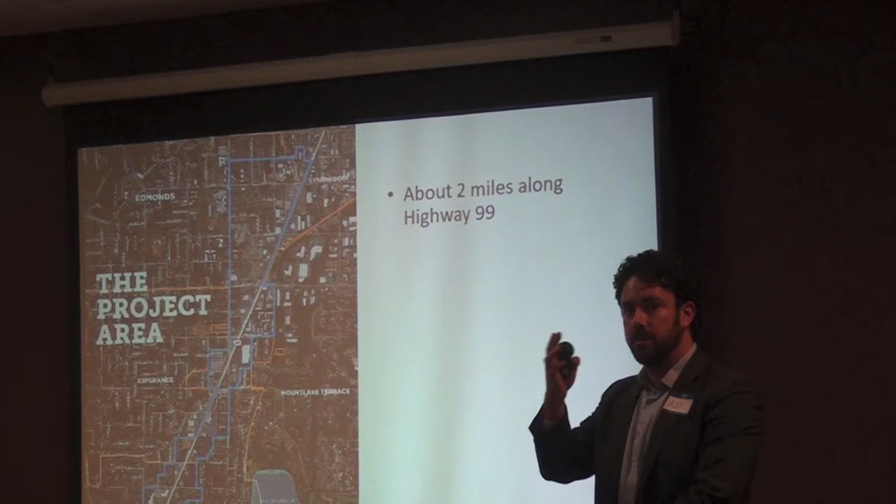So generally, I think we're all sort of familiar with the project area. It's a 2-mile stretch along Highway 99 in Edmonds, highlighted here in blue and also on one of the boards.

One of the things that came up both in previous planning efforts and as part of this effort was that a sense of identity was really needed on Highway 99, so you knew where you were. Some organizing principles came up: in the south end of the corridor, there's an opportunity to really present that we've arrived in Edmonds, the Gateway District, emphasizing that you've arrived and a sense of place there.

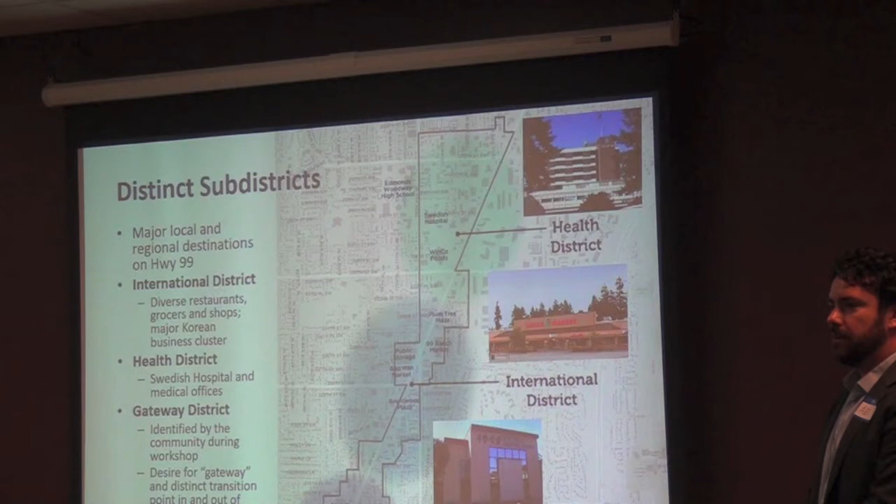There's an international district. There's already lots of businesses, grocery stores and restaurants. We want to reinforce that area of Highway 99 and engage with folks there to figure out what the next chapter for that stretch of Highway 99 is, the international district.

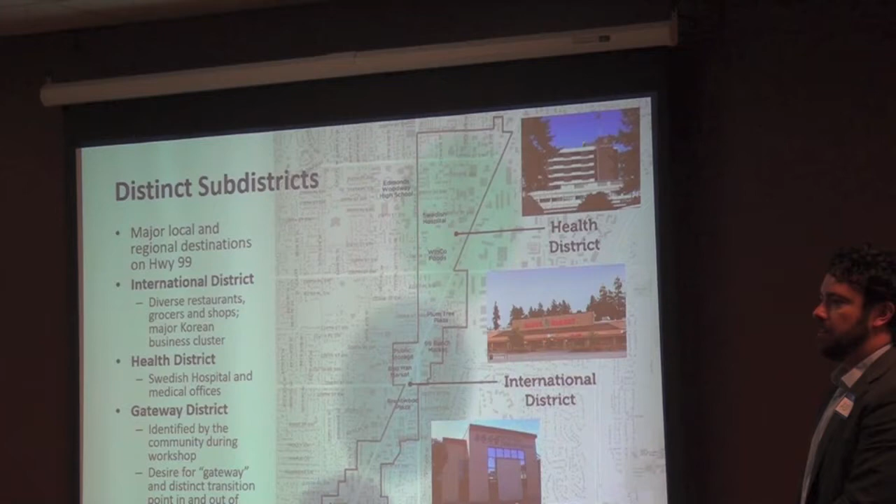And then obviously the health district, where we are right now. There's an opportunity to think about associated industries that are complementary to health, and also nurture that critical employer in our city.

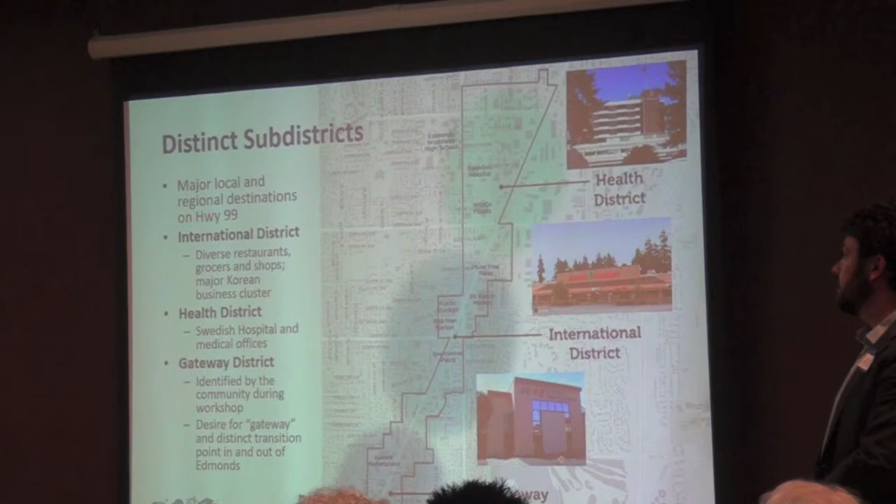The analysis portion of the process identified several things. It identified not only where we already have pretty good urban bones, good street connectivity, a lot of economic activity, but also where we have some missing legs of the stool. So there are stretches of 99 where there's a very long way before you can safely cross. That was identified as an issue we wanted to address in the plan.

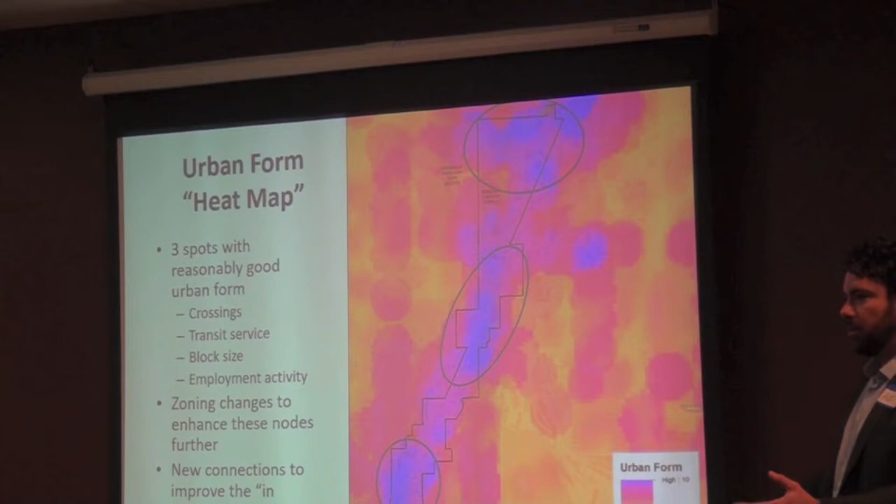So we did a lot of computer modeling and walking tours to figure out what was working and what wasn't, and that, along with the public workshop information and testimony, has shaped where we are today. As you can see, there are some stretches of 99 where safe crossings could benefit pedestrians and folks walking to school and the like.

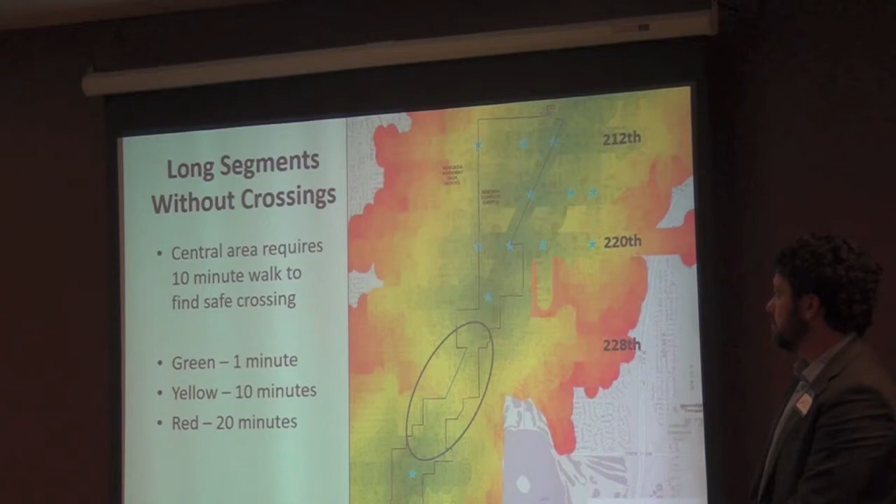In March, we had a public workshop. This was an opportunity for probably a lot of you to share what your vision for this stretch of 99 should be, both in terms of transportation improvements that make this place better and safer from the pedestrian point of view, from bicycles accessing and crossing Highway 99, from transit users' perspective, and also safe and more predictable auto movements, because there are a lot of auto conflicts that exist on Highway 99.

But in addition to that, not just stopping at the road, what's the future of the land use, and what are the land use opportunities? So both land use and transportation visions were established in that process, in that workshop.

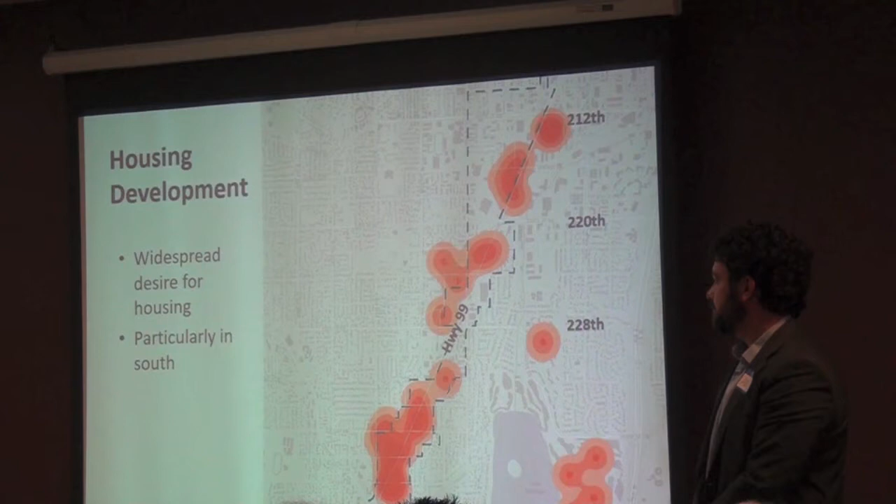Some of the outcomes: there's clearly a desire for additional housing options on and around Highway 99. Mixed use is not new to this region, but it is a rather new concept in this particular area. There's a desire to see more mixed use that includes residential and office uses above ground floor retail uses.

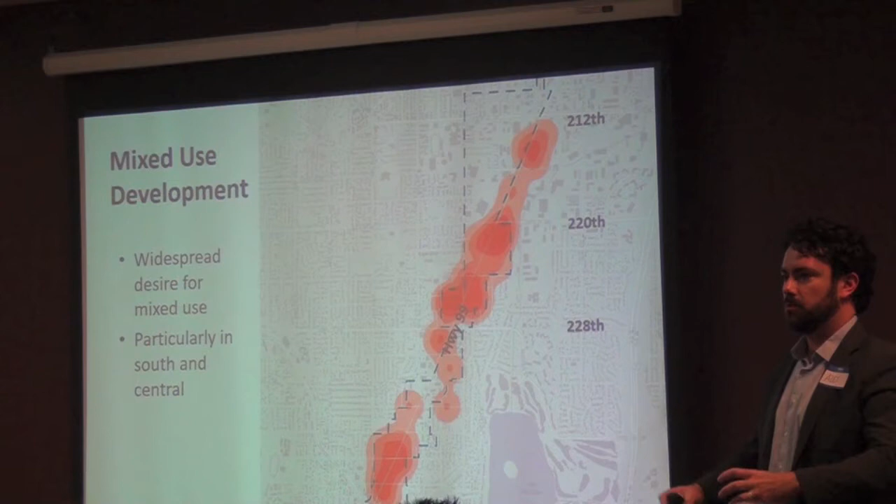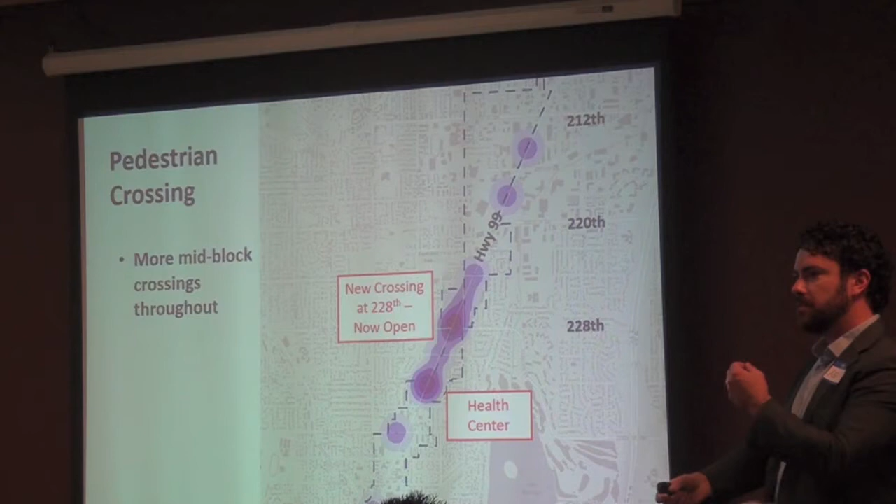There were very specific recommendations on needed improvements for pedestrian enhancements. You can see where these hotspots came up, where a lot of people put down chips repeatedly and told us loud and clear that we needed to strengthen connections in some of these areas.

The community values that are really our touchstones as we have progressed along the process are about connectivity, both along the corridor and across the corridor, accessing destinations, reinforcing the destinations that exist today, but also thinking about what are the new destinations we want to see achieved on Highway 99.

Beautification was a big one. Right now there's opportunities to think through medians that are landscaped and introduce tree canopy, making it a more pleasant place to both drive and walk and use transit.

Safety and walkability - obviously there's been some high profile pedestrian incidents on the corridor, so we want to make sure that whatever we do has an emphasis on safety and ensures that walking is a very safe thing to do.

Affordable housing, obviously in this region, is a major concern, and this may be an opportunity to think about affordable housing opportunities within this area. And then supporting healthy businesses and a wide variety of businesses on the corridor.

So these are our touchstones. Whenever we have issues, we try to go back and say, is this addressing our goals and our community values?

So a high-level overview of the plan outline, and this will be circulated in draft form here after the new year. We're going to rehash some of what we've talked about today.

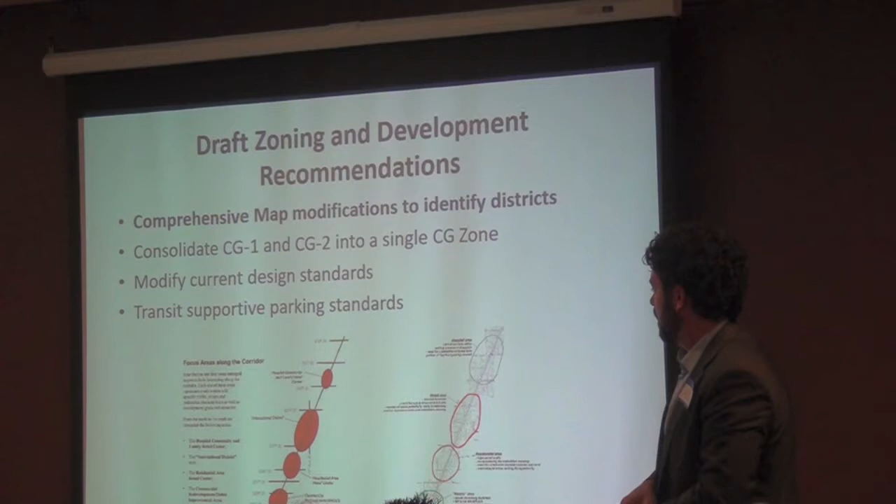So there's a need to update the comprehensive plan to reflect what we learned in this process. That involves updating how we now view this stretch of corridor in terms of the sub-districts: the Gateway District, International District, and Health District. So we want to update the comprehensive plan to keep it fresh and current to reflect this planning effort.

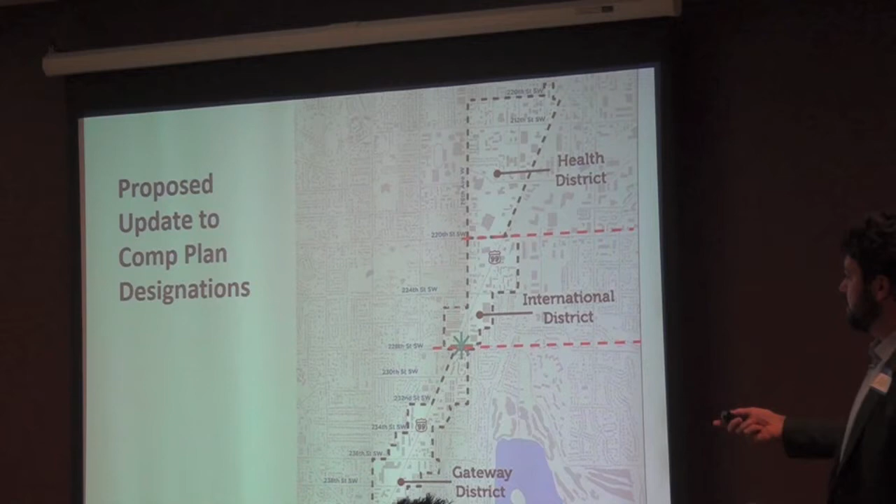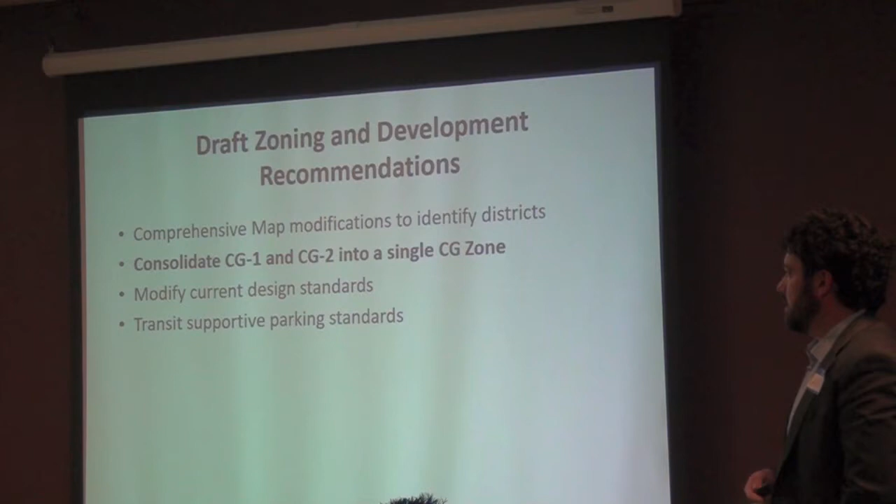This will be the map highlighting those and then some of the key gateway features that need to be emphasized moving forward. As part of the zoning recommendations, the recommendation right now is to consolidate the 2 commercial zone classes that exist on the corridor.

Right now, because we inherited in this area a multitude of zoning classes from the county when it was annexed, there's sort of colors all over the map. This was an opportunity to think about, is that really reflective of what we heard in the workshop? Are we getting out of the zoning what folks said that they wanted to get?

Right now, there's these 2 commercial zones, the CG1 and CG2. The main distinction between the 2 is that one of them allows 60 feet in height, one of them allows 75 feet in height. From a construction typology point of view, it makes sense to consider the 75-foot height limit so that you can get a comfortable 5/1 type construction, so a 6-story mixed-use building in there.

So the proposal is to clean this up and to consolidate them into what would be the new CG zone, but it's akin to the CG2 zone.

There's also many remnant zones scattered throughout the corridor. One of the posters goes through this in detail. There's an opportunity to clean up the multifamily zones adjacent to the corridor. Those were used for buffering, which is the intent of that is obviously clear. You want to have transition from the corridor into the neighborhoods from a design point of view.

The approach we're recommending, rather than having multiple zones, is to build design and massing regulations into the zone, so that a building next to a single-family house will have a massing treatment—there are diagrams in the back—that keeps the bulk away from the single-family zone. So the intent of why there's multiple zones there will be reflected in the design regulations, which we'll go into detail here.

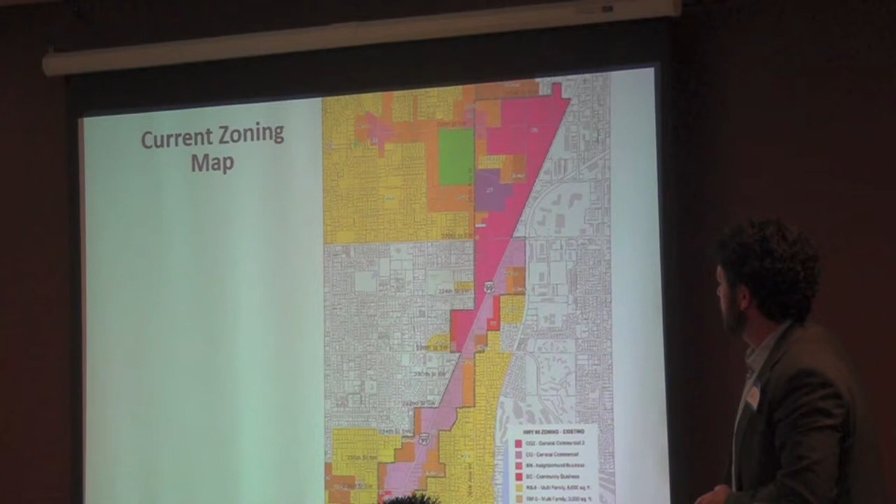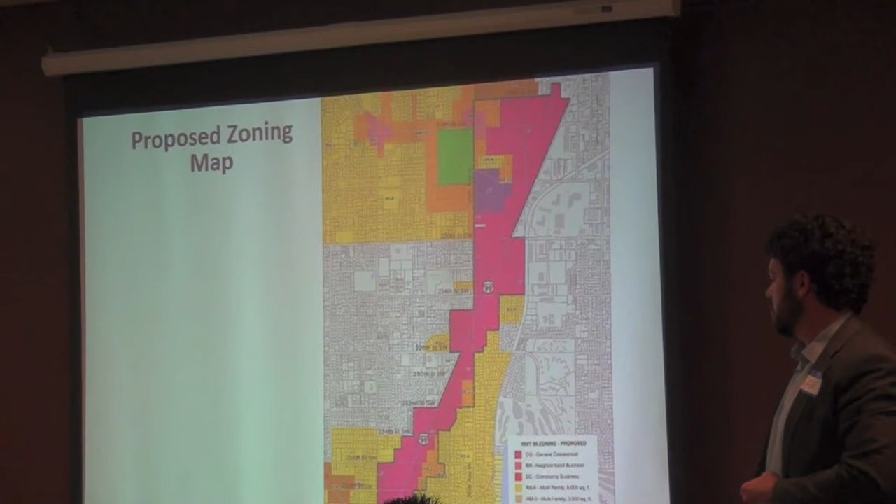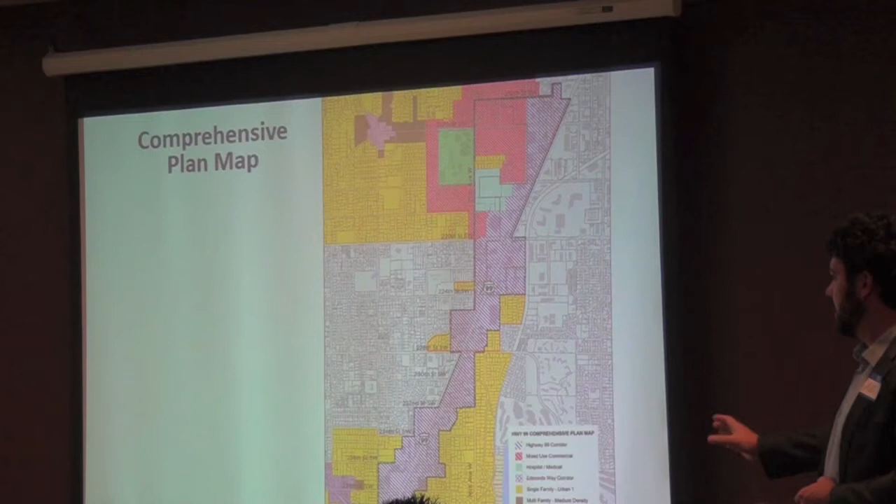So an overview—you can see it's kind of a technicolor zoning map in here, right? There's a lot of remnant zones, but the recommendation is to do some cleanup and consolidate many of these into the new CG zone with additional design treatments built into the zone itself. This, incidentally, is actually way more reflective of the comprehensive plan map, which is a lot cleaner, so it's really getting it more closely aligned with the comprehensive plan map.

So how do we address the issues of design, which is very important? There are several ways design is addressed in the current code, and many of those are perfectly fine. We wanted to be strategic and only address what we saw as an opportunity to think about better design. Right now there's a minimum 4-foot wide landscape setback on street frontages—not necessarily a sidewalk, but grass, bushes, and things like that.

Along Highway 99, the right-of-way is very constrained, and the sidewalk is right up against the road. So we want to think a little more creatively about how to get more sidewalk area and pedestrian friendliness. That's one area of the code we're going to talk about.

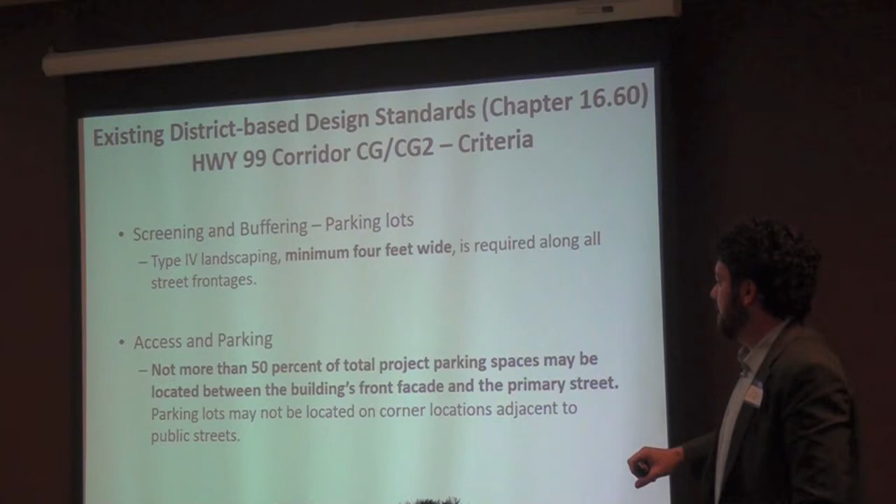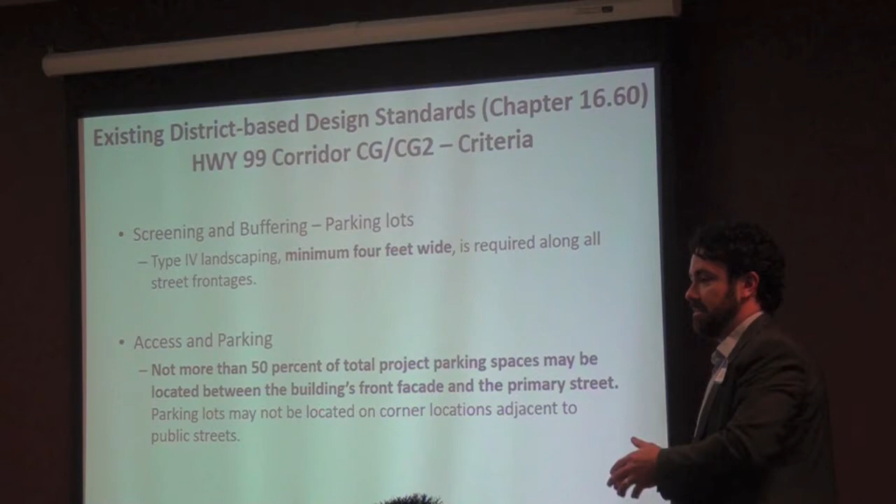And then there's access and parking. Right now it says no more than 50% of the total project parking spaces may be located between the building's front facade and the primary street. Well, that could mean a lot of parking is still between the sidewalk and the building—if it's 50%, that could be a heck of a lot of parking. So we wanted to think more intentionally about the design element.

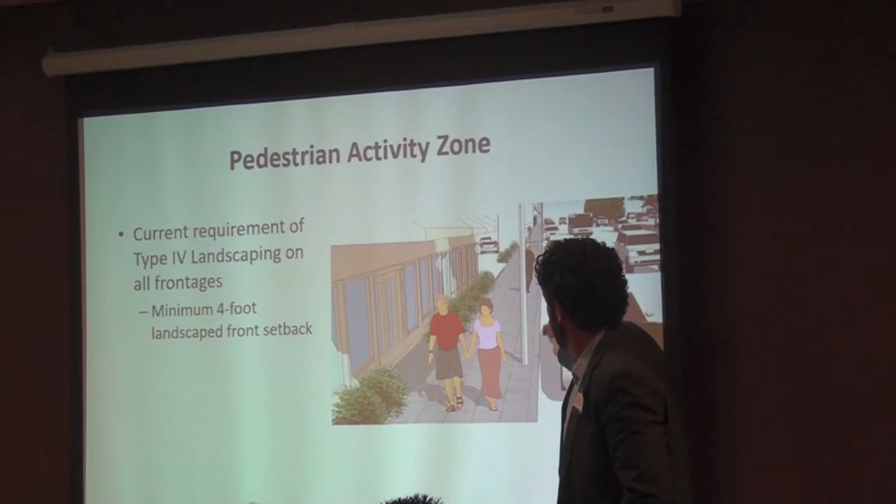So this is an illustration of the current code. You have your sidewalk right up against the roadway, with a landscape treatment here—4 foot. The idea here is a pedestrian activity zone where you still have the sidewalk, but you have a 10-foot area between the back of the sidewalk and the front of the building. That's the pedestrian activity zone.

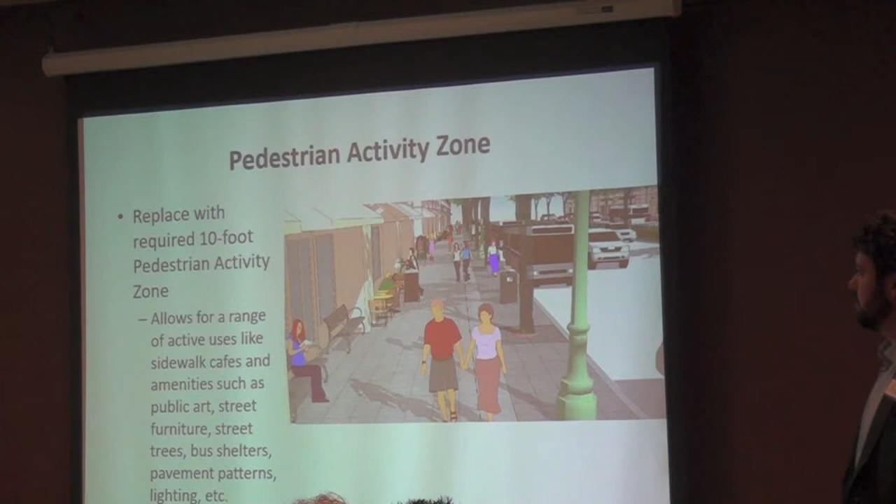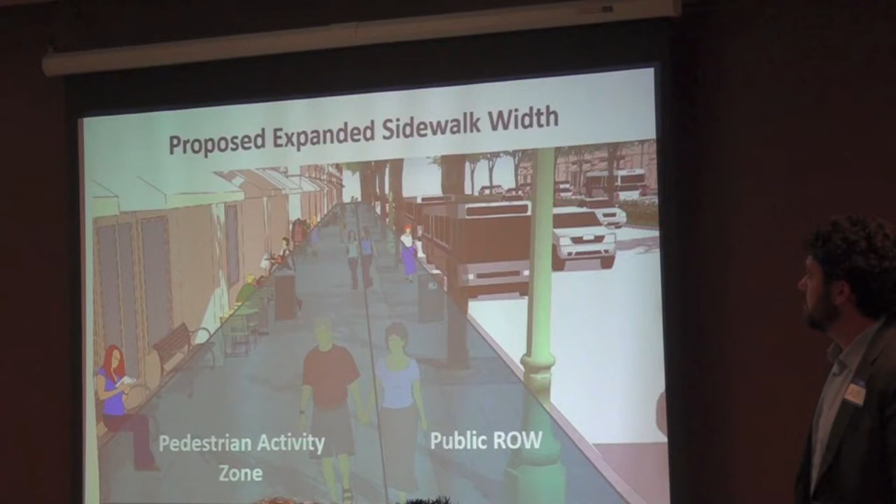This allows for businesses to open and sell wares on the street. It allows for sidewalk cafes and more seating, ample ADA compliance, and a walking area. So it essentially allows us to get more pedestrian realm on the side of the street. This is a further illustration of that concept—here's where the sidewalk ends today, and with the pedestrian activity zone it would basically add twice as much area, enhancing that area.

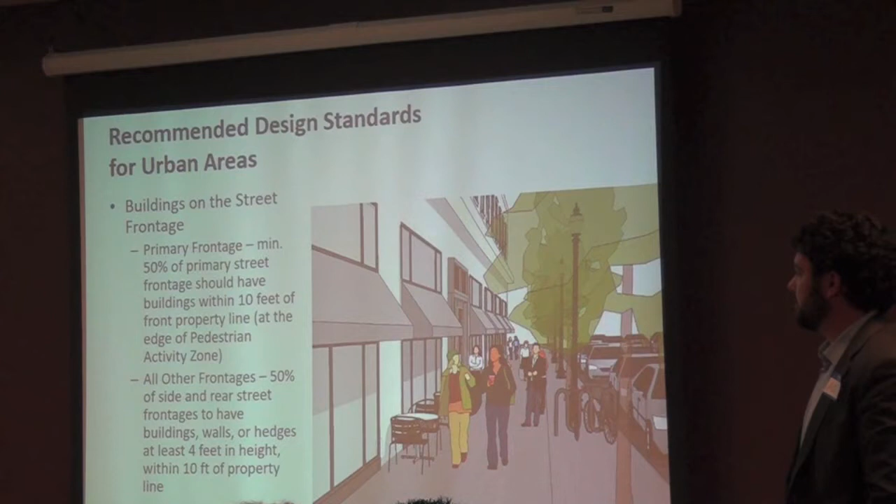So buildings at the street frontage—this is where we get into some of the urban design of the building itself. Our recommendation is that a minimum of 50% of the primary street frontage should have buildings. Not all the street frontage needs buildings to have a good sense of place, but 50% of any lot frontage needs to be right up against the sidewalk so people can access it safely and conveniently. That's an important urban design recommendation.

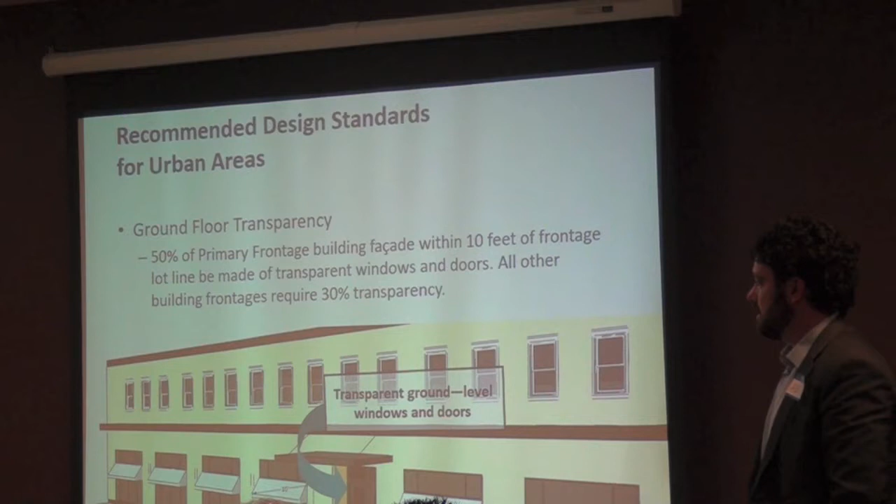Transparent ground level windows and doors—so as these buildings get reoriented to the roadway and sidewalk, we don't want to end up with just a big blank wall that's unpleasant to walk by. We want active uses and transparent ground floor so that it's a pleasant and interesting place to walk.

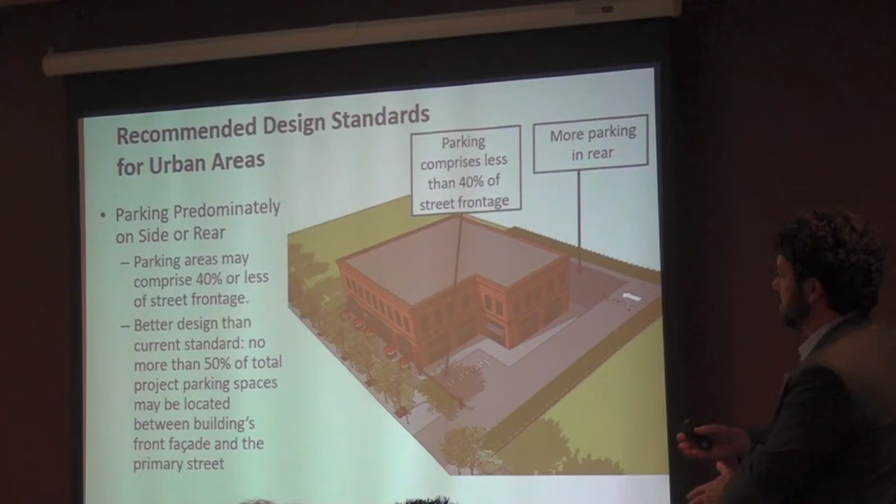So the location of the parking is obviously important. We recognize that the area is in transition and we still have to accommodate cars, but we can accommodate them better than the current code does. So for the entire parking lot of a development, only 50% would be allowed at the front edge, recognizing some short-term parking needs to be accommodated, but 50% needs to be in the rear of the building. That works in tandem with the frontage requirements we've laid out, orienting buildings more towards the sidewalk and parking in the rear.

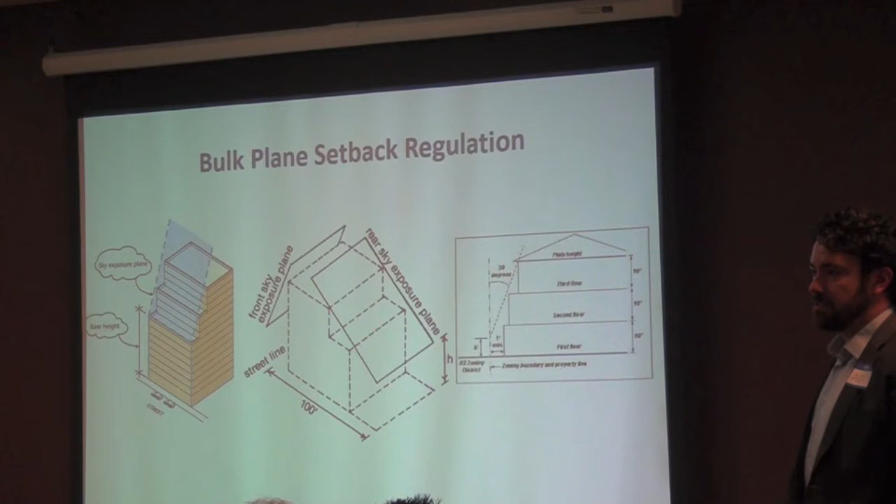Bulk plane setback regulation - I know that's a mouthful, but this is essentially how we are recommending to regulate how the larger urban buildings will taper down into the existing single-family neighborhoods. It's important to respect the neighbors while also accommodating additional housing opportunities in the area. This is going to be built right into the zoning code.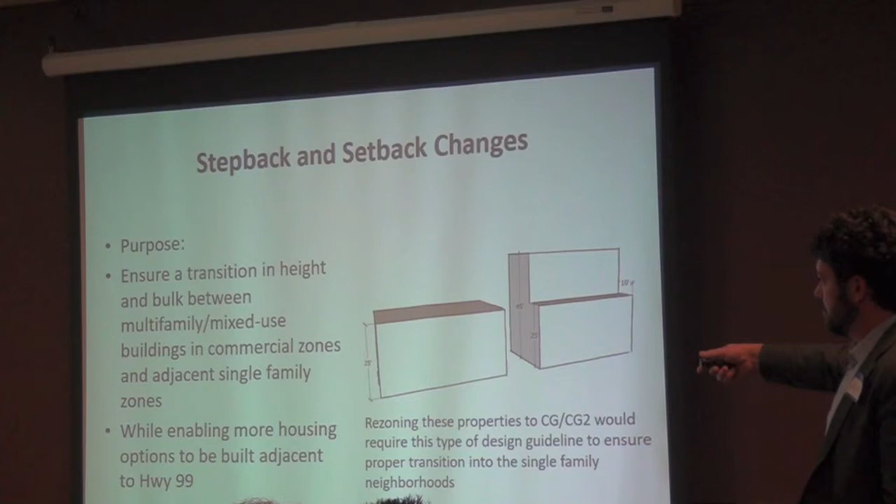This is just an example shown on one of the posters, of a mixed-use library in our neck of the woods in Portland, one of the suburbs, where you can see the design treatment, how it steps back from the roadway. Right now, current requirements on many multifamily areas around the corridor cap out at 25 feet. We want to continue to allow that, but as we think about going higher, make sure we have a sufficient transition into adjacent neighborhoods.

For multifamily projects adjacent to the corridor, there's a lot of instances where lots may not front Highway 99 but are within our study area, and they may look across the street at a single-family home. So the design treatment is very important there. The recommendation is to have a 5-foot setback on the street that could have bushes and landscaping, or more pedestrian amenities, and then begin a tapered approach so you're not looking across the street at a wall - you're looking at a tapered building from a single-family home.

We're not recommending to change the 15-foot setback from the lot line at the ground level and 10-foot landscaping buffer if you're immediately adjacent to a single-family home. So if you're right on the lot line with a single-family home, we want to have a little bit more breathing room there - not recommending any change there.

For mixed-use buildings adjacent to single-family, there's a slightly different play here. Also not recommending any change to the setback. That includes a very dense landscaping requirement - a little hard to see in this picture - immediately adjacent to the lot and a 15-foot setback.

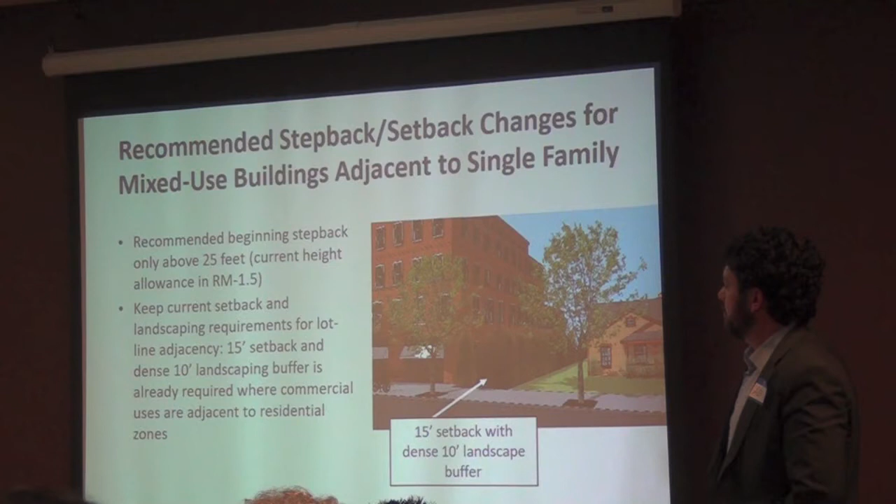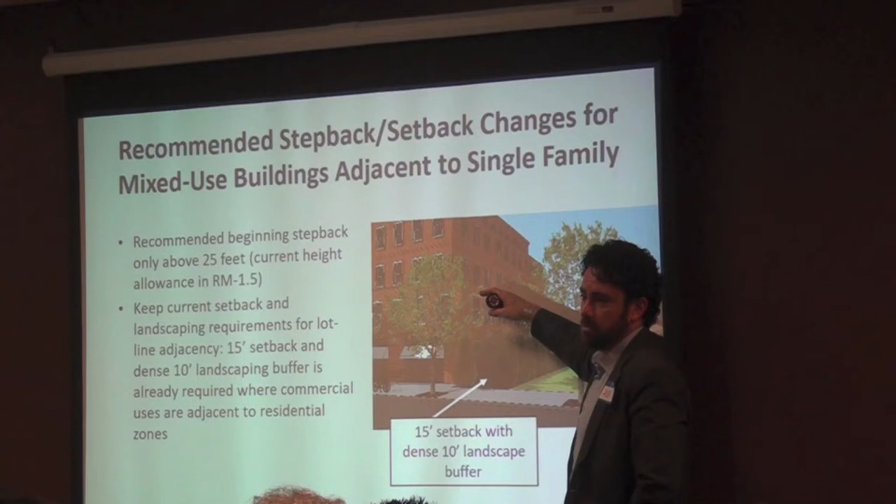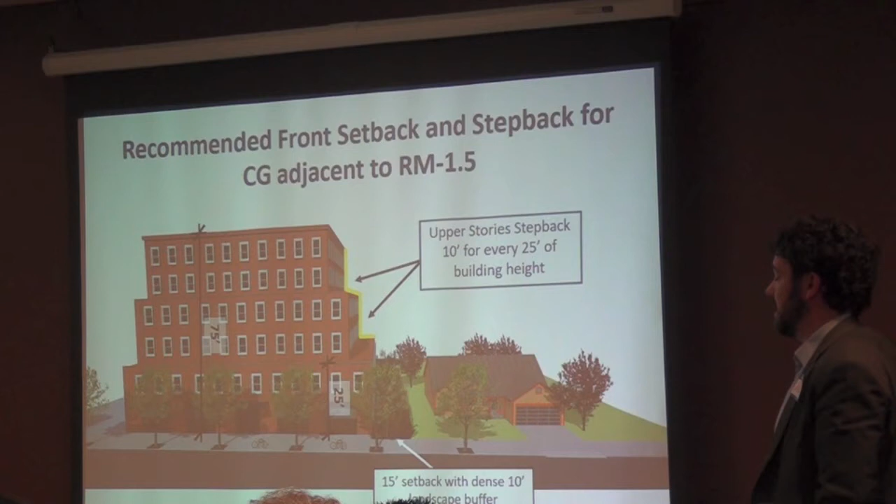We are recommending that the height begin to step back above 25 feet. The current requirement already allows you to build to 25 feet in these multifamily zones, so we want to allow that tapering to occur. This is an illustration of what that will look like - we have a very dense landscape buffer at that 25-foot level, and then the building begins to taper back for every 25 feet in height, pushing that side of the building in 10 feet. That's the basic concept - this is like the max building you could build within the new CG zone, and currently in the current zone as well.

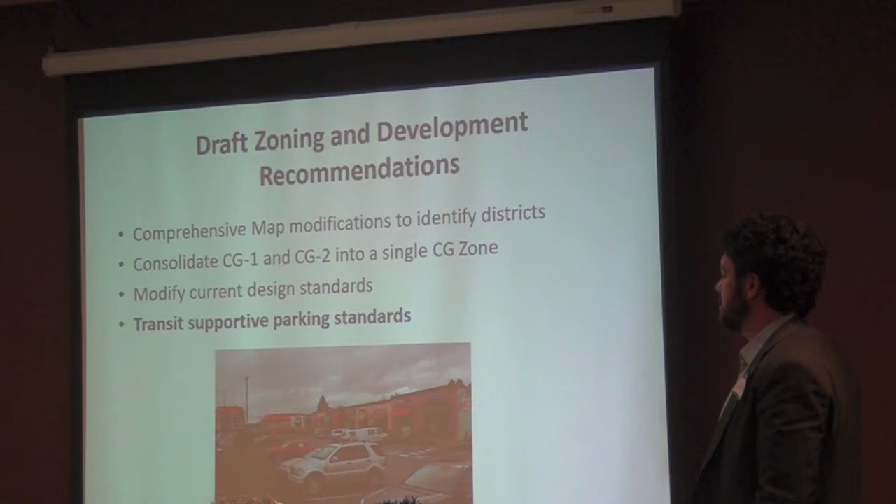Transit-supportive parking standards. Parking is an important consideration when we talk about mixed use. It's extremely expensive to go underground with parking and put it into structures. Parking demand for mixed-use projects is generally lower than standalone retail or standalone apartments, so we want to be considerate of that, especially since this is a high-capacity transit corridor.

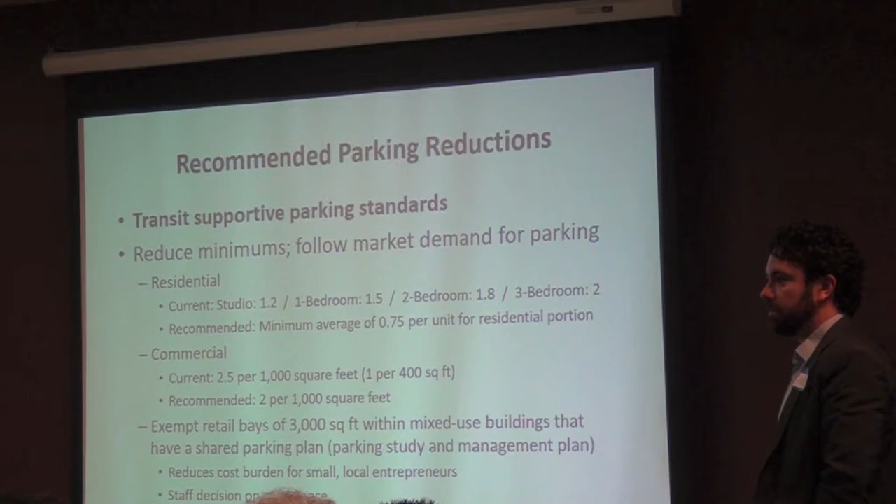Right now, the current parking standards for residential require that if you build a studio apartment, you've got to put 1.2 parking stalls on average per studio; a 1-bedroom needs 1.5, a 2-bedroom 1.8, and so on. The recommendation is to not look at the bedroom mix necessarily, but on the residential program of the building, the developer has to achieve an average of 0.75 per unit. So some affordable studios may not, by right, come with a parking stall - there are folks who just don't want to mess with a car, and right now this doesn't allow for those folks. They still have to pay for it in the rent.

So we want to allow opportunities for lower cost housing units here. The commercial recommendation - right now we have a current non-residential parking ratio of 2.5 stalls per 1,000 square feet of building area. The recommendation is to shave a little off that, going to 2 per 1,000 square feet, with one exception.

For smaller retail bays, these would be smaller local shops incorporated into a mixed-use building with a shared parking plan that shares the parking among the residences and the commercial. You can be exempt from the standard itself, but you still have to park it. You have to work out a shared parking plan that's approved by the city so that parking is available on a short-term basis during the day and at night for residences. It's a very common practice.

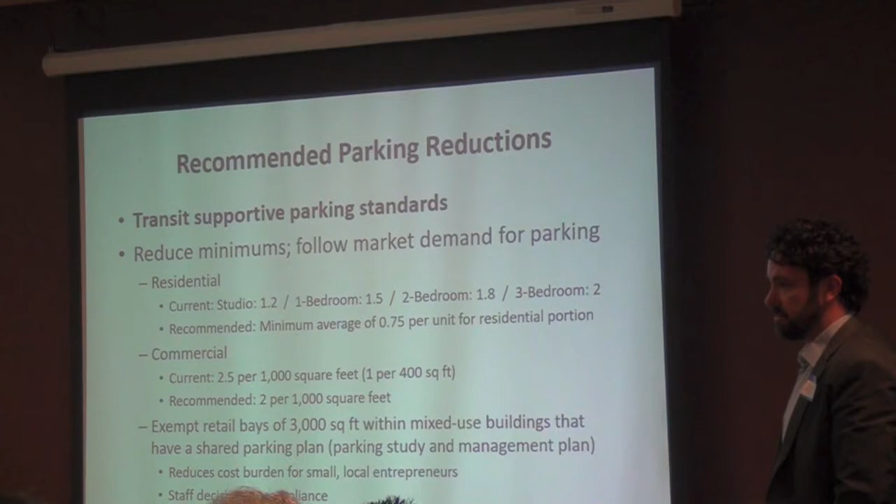So there's several tools that we have in our toolbox that we can make use of to expand opportunities to build affordable housing in the corridor.

One of the most prominent of those is what's called a multifamily tax abatement or exemption program. So the idea here is that if you're a developer and you want to build a mixed-use building or an apartment building, the city will forgive your property taxes for the residential portion of that building if you agree to incorporate one-fifth of the units into that project at an affordable rate. Which is a very, very economical way for the city to generate long-term affordable units. Very cost-effective, from the development point of view too. It's a very effective program that's been used all across this region, all across the country.

We also are recommending that the city pursue a mixed-use, mixed-income demonstration project. Now, we don't know where this would be yet, the details are limited. But the idea here is that the city plays a partnership building role with either a nonprofit builder—the Korean Women's Association, for instance, does these types of mixed-use projects across the region—they identify a site with a willing owner, actively recruit developers. It could be nonprofit or public-private partnership opportunities, cultivate a champion within the community, and get a project out of the ground that is mixed income and mixed use.

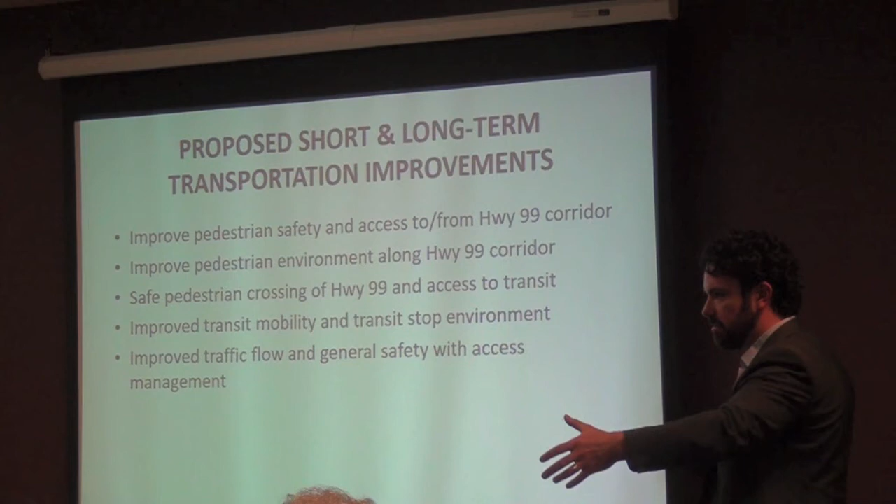All of these are important for improving transit mobility, transit access, and the general stop environment. We have these really beautiful stops, and there's an opportunity that those can be the driver and focal point for future development, orienting around those stops. And then improve predictability and traffic flow to reduce conflicts for people driving.

I'm sure everyone in this room has been in a near miss on Highway 99, so that's definitely part of the plan recommendations - more predictable movements.

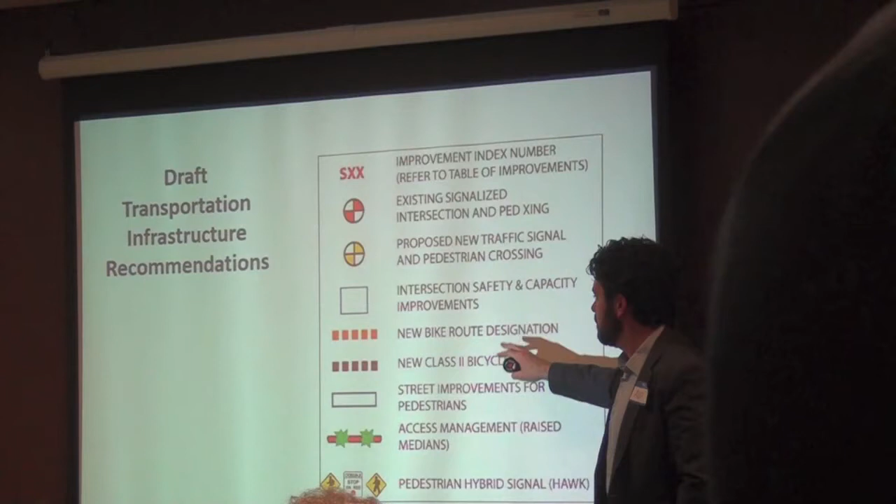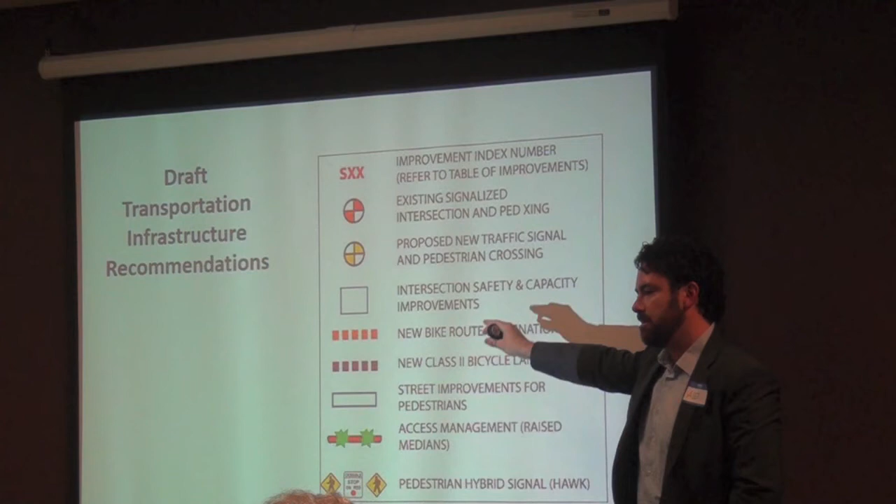I'll stand back by that map. There are a whole lot of recommendations here, very specific about new bicycle routes, new bicycle lanes, intersection safety and capacity improvements. There's one new traffic signal proposed in that missing gap that we identified earlier. There's access management - this is like landscaped medians, so that you prevent people from just making a left whenever they want to, kind of controlling the flow of traffic, making it very predictable.

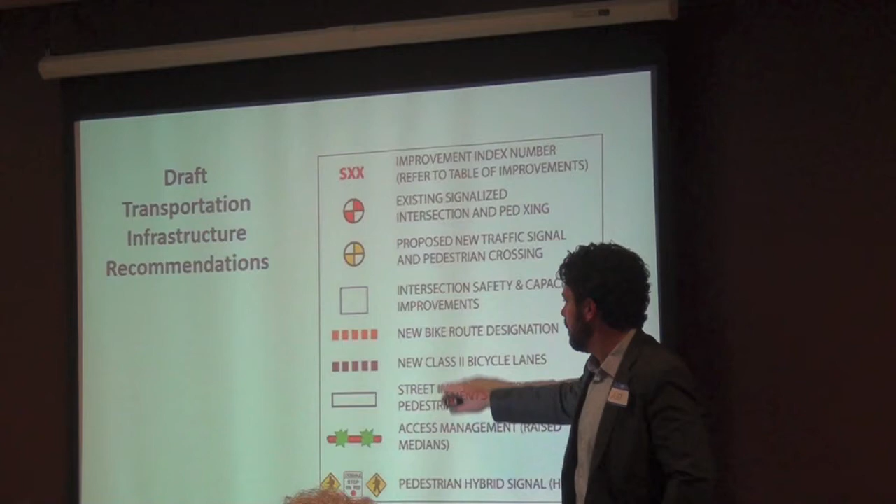And then there's pedestrian hybrid signals - this is where you don't have a full signal, but something that people can push a button for and have a very highly visible crossing.

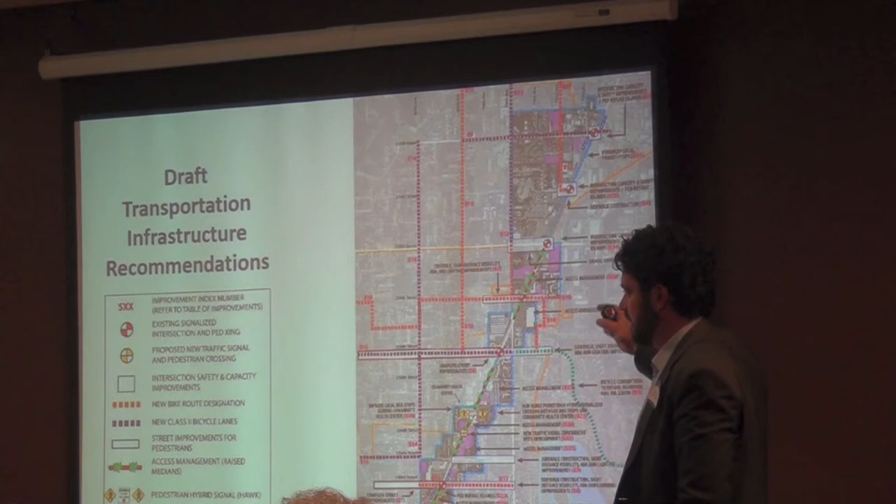So this is just the legend that's on the map, that's the range of improvements. Obviously you're not going to be able to read this, but there's a big blow-up of it back there, and it's also on the website for further mulling over and comment. We'd like to get detailed comments from folks on this stuff.

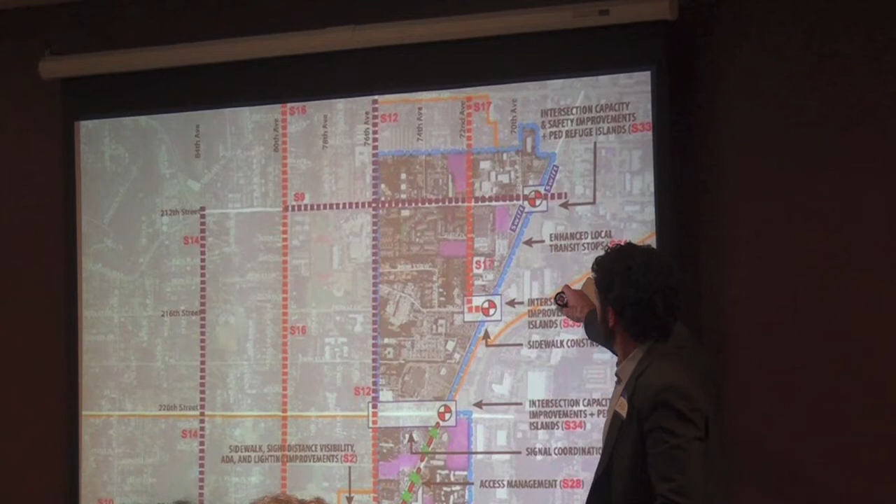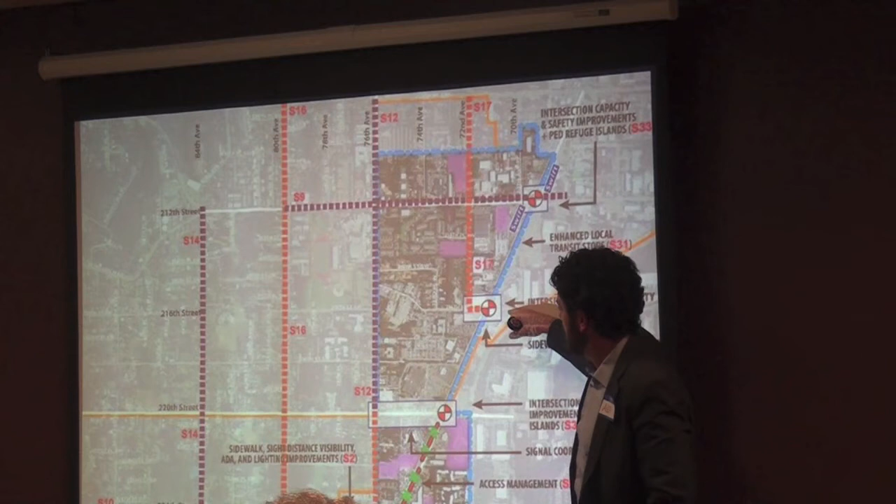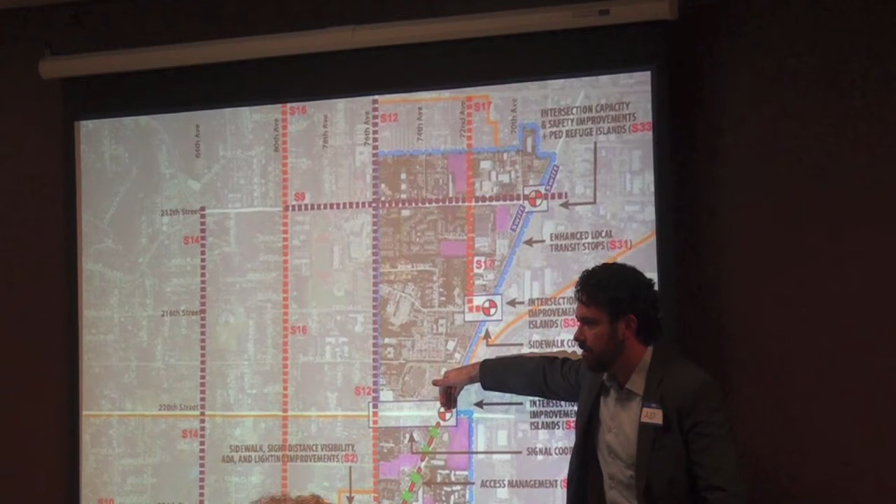At a high level, these are the existing intersections in the north part of the study area that are in place today. These boxes are improvements that make the connections from these roads onto Highway 99 better lit and safer for pedestrians, because we got a lot of comments about people traveling down Highway 99 at a high rate of speed and then zipping off the road, with people pushing their stroller and nearly getting hit. So thinking about how improving safety as you get closer and closer to Highway 99 is very important.

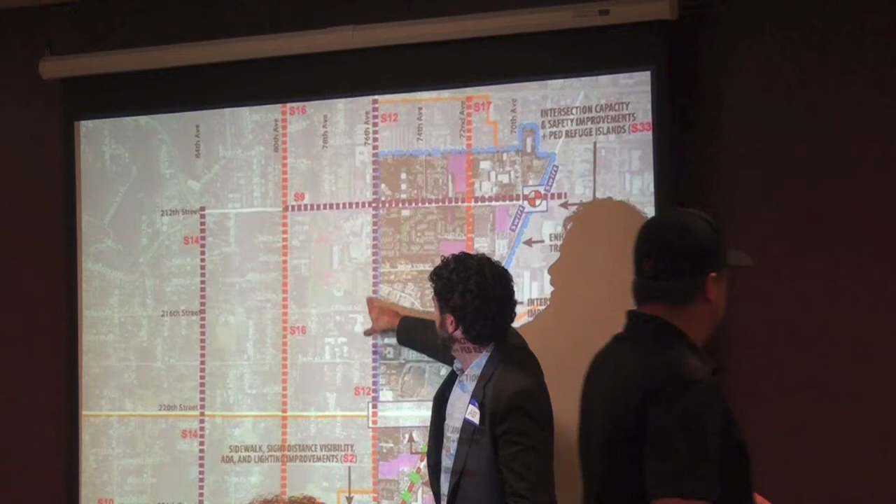Also, additional really high quality bike routes with bike lanes, and then kind of lower stress bike routes as well. Not everyone is going to be out there on their Lycra biking at 30 miles an hour - you want to have some low stress bike routes too. So thinking holistically about how people get across the corridor, but then also what's the experience as you travel up and down the corridor.

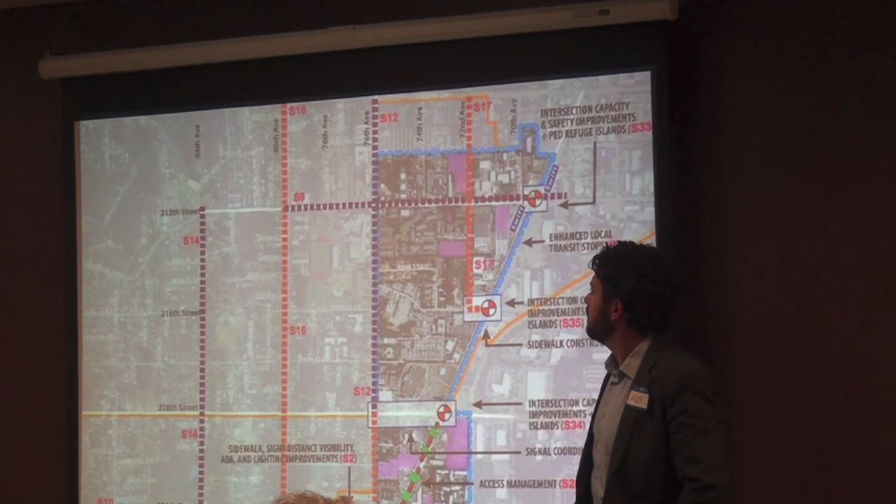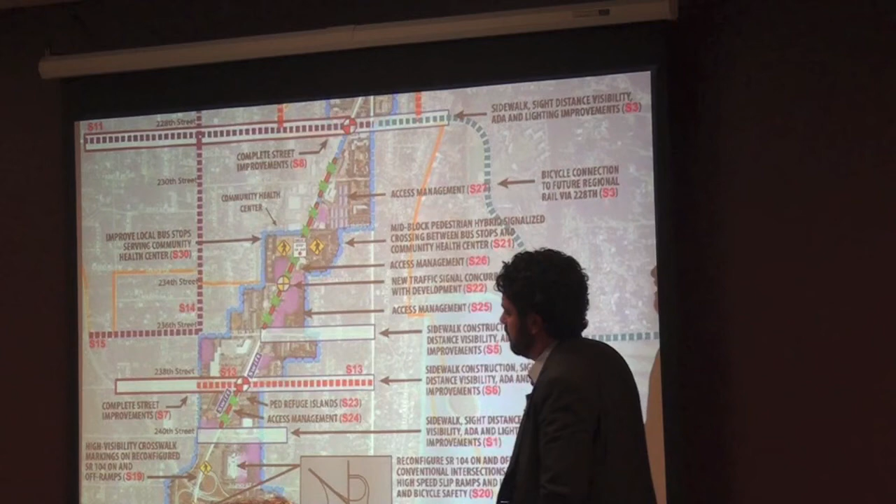And here's the southern end. So here's the only new signal recommendation at this point. If you recall, there was a big gap here in terms of the safe crossing. We have an either-or here that we're working on, whether it's going to be a highly visible pedestrian crossing or a full signal. So feedback on that would be helpful. And again, these connections to the corridor, improving the safety as people and bicyclists approach the corridor.

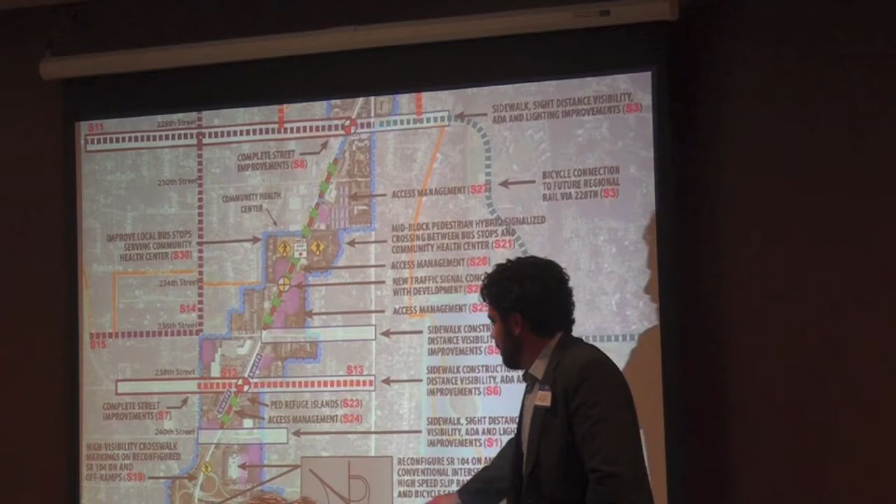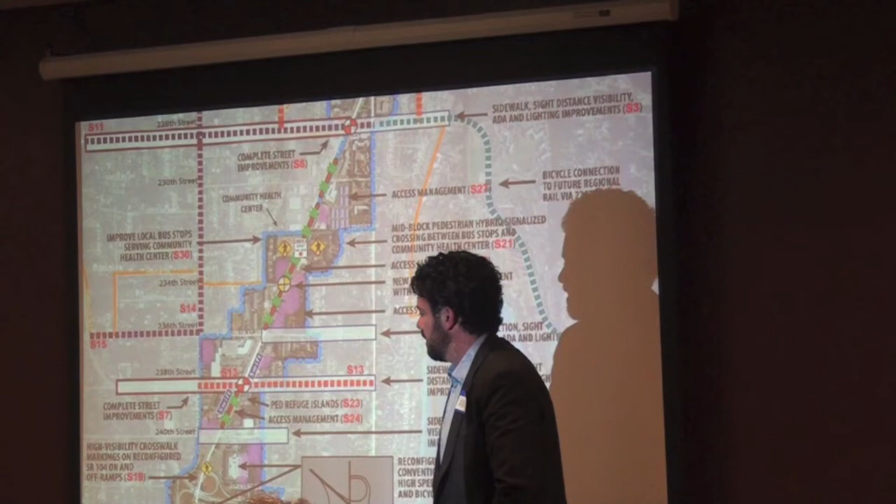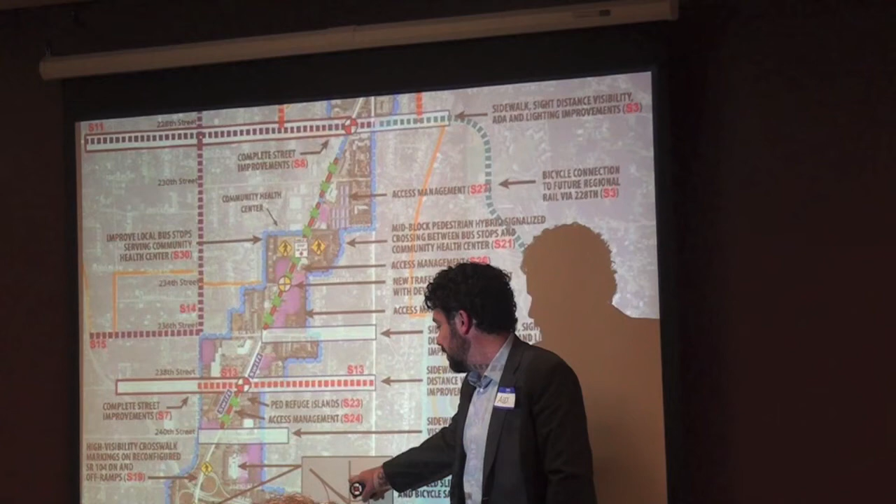This is one of the strategies we're working on to improve safety at these conflict points. As several people have mentioned, there have been a lot of near misses because people are just whipping right onto Highway 99 right there. So how do we continue to make it predictable and safe for people to drive, but also allow safe movement of vehicles and people across that highway interchange?

So those are some low cost but really effective solutions as well. And as I said, there's a lot more detail about this on the website, and I'll be available at the map to talk through some of this stuff.

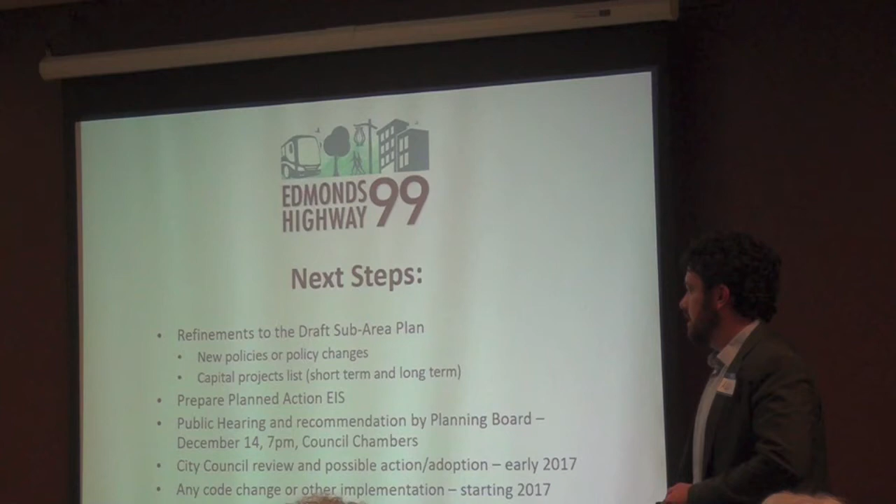Okay, so where are we going from here? We are in the process of drafting the plan, still taking recommendations. We want to get this thing refined and into draft form so that we can get it before a public hearing and receive recommendations from the planning board on December 14th. We want city council review in January 2017, and we're hoping to reach adoption in the first quarter of 2017, February-ish at this point.

Any questions for the group? Okay, three questions. One is, with the new building, are there plans for underground parking? And if not, why not? Underground parking is permitted. And two and three, when will this begin, and how long will it take?

How long will it take? I can't answer that, I wish I had a crystal ball. These types of roadway improvements don't happen overnight. The city needs to be in a position to go to the legislature and try to accelerate some funding to get some state funds. So we're working on making sure that whatever the exact deliverable looks like, they can immediately run out the door and start to get the state excited about making these improvements. From a development point of view, it's anyone's guess, I can't predict that kind of thing. But in terms of when the project, we hope to reach adoption at the city level, we are aiming at February of this coming year. So it's not that far away.